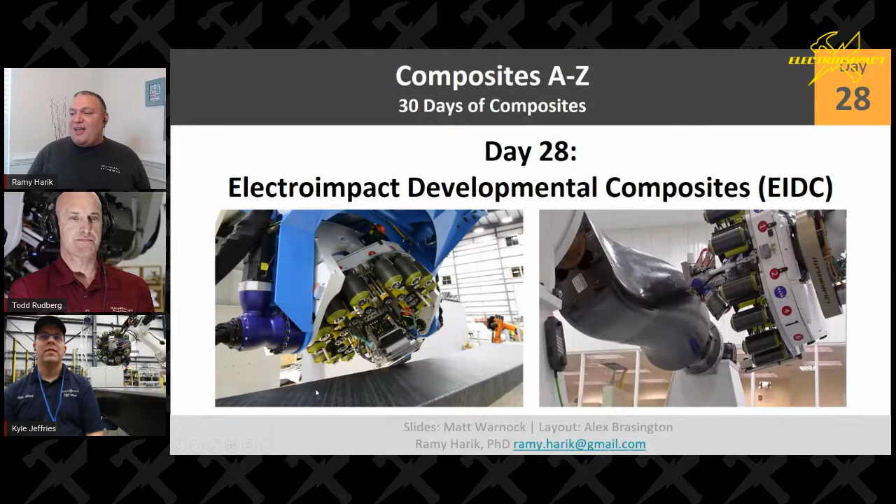Todd and Kyle, you guys have a presentation. We're going to power through - this is really more of a discussion we're going to have with each other. If I understand correctly, we're going to try to cover 4 elements: what Electroimpact is capable of doing, the motion platforms, Electroimpact technologies, and the Electroimpact processes. We're going to be powering through this, and we have some videos as well to play every so often.

So let's go ahead and start with Electroimpact capabilities. Who wants to talk about that? Is it you, Todd, or is it Kyle? All right, go ahead, Todd. Tell us, what are we seeing in here?

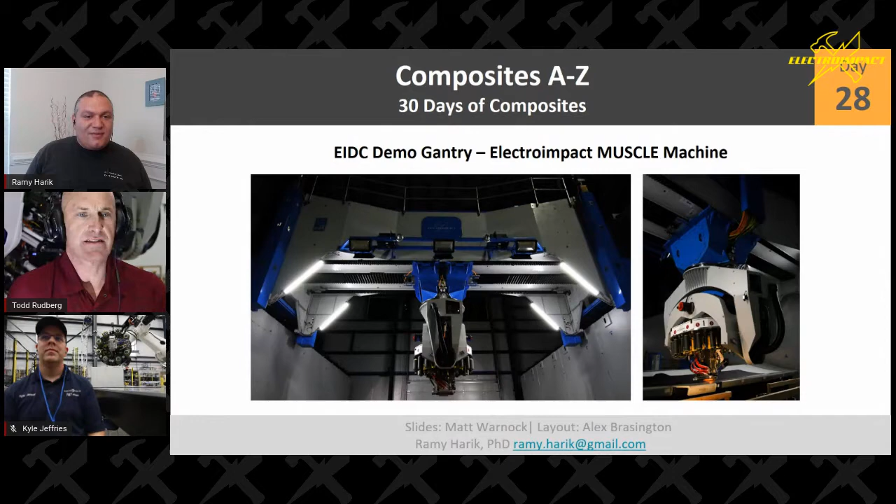Okay, so what you're looking at here is one of the machines in the Electroimpact Developmental Composite Center. It's a huge machine, very large envelope. Matt, go to the next slide, or if you could, Ramy, go to the next slide.

The machine that you just saw a picture of, I'm sitting in that cell right now. You can see that we have a huge envelope machine here capable of building - that happens to be the better part of a 777X wing spar in here. We've built 777X wing skins in here. We've built a bunch of neat parts for Airbus in here.

So we get to do a lot of work in here. If you have a large part that you need to see, or if you need to develop a process for some sort of large part, you want to see if AFP is the right solution, whether it be thermoset, thermoplastic, or dry fiber. We can handle all those materials here.

All right, this is awesome. So how big are we talking? I see on the screen there, we're talking about 84 inches travel in Z, almost 300 in Y. And I don't know if I can see it, but how far is it along X? Can you travel? Yeah, it's about 80 feet in X.

Oh wow, it's a big envelope. And the head can hit all 5 sides of a part - there's no limitation, the swivel head can hit, if you imagine a 5-sided part, we can lay AFP on all 5 sides.

All right, that's awesome. And this configuration, you said principally you guys are doing this for which part? I heard it's the wings.

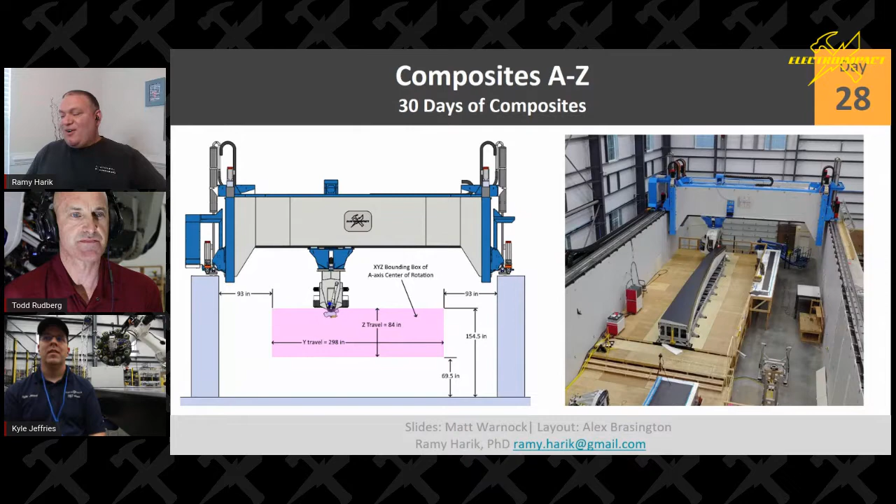All right, awesome. So let's move on to the next chart. So what is it that we're seeing in here?

So now, can you hear me okay? I can hear you perfectly, Kyle.

We have the big demo gantry that Todd just presented, and we also have a couple of robot assets for R&D in the same facility. We have a large temperature controlled building that houses all of the projects we build for customers, the machinery, the robots, the gantries, and it also houses the demo gantry you just saw and the robot behind me, and all of the robots we use for R&D.

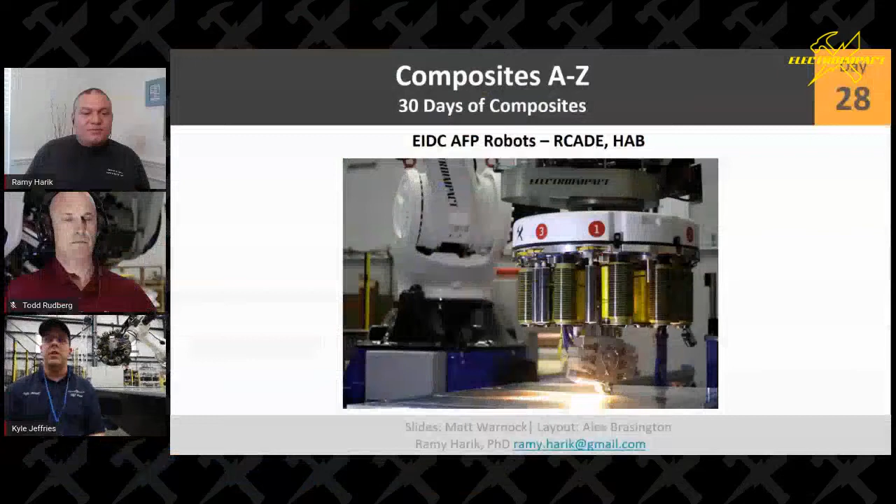The end effectors that we use on the demo gantry are transferable between any of these machines. They're all modular and quick change, so we can take a process or an end effector and move it to whatever asset we have available to do testing at the time. We do material development, process development, part trials, all the things Todd named with these.

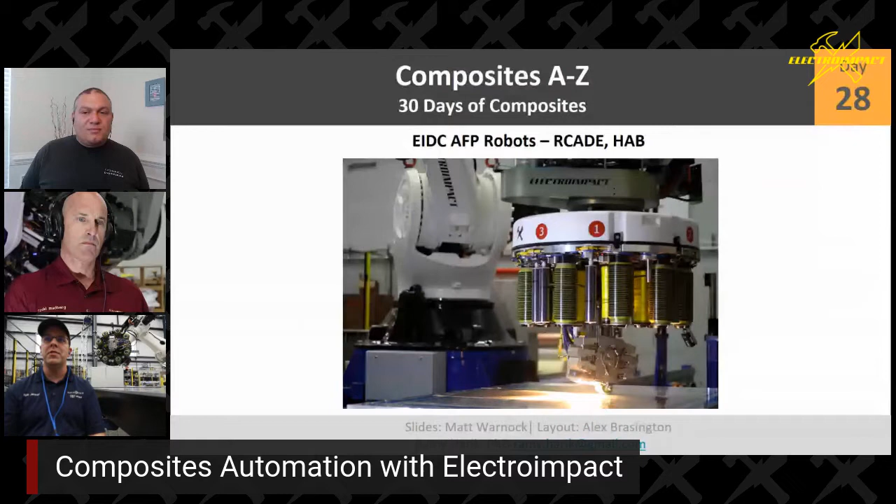We have some videos if Matt wants to throw one up of the robots in motion and the demo gantry building some parts here. Let's see if we can fire one up. All right, awesome. So go ahead, Todd.

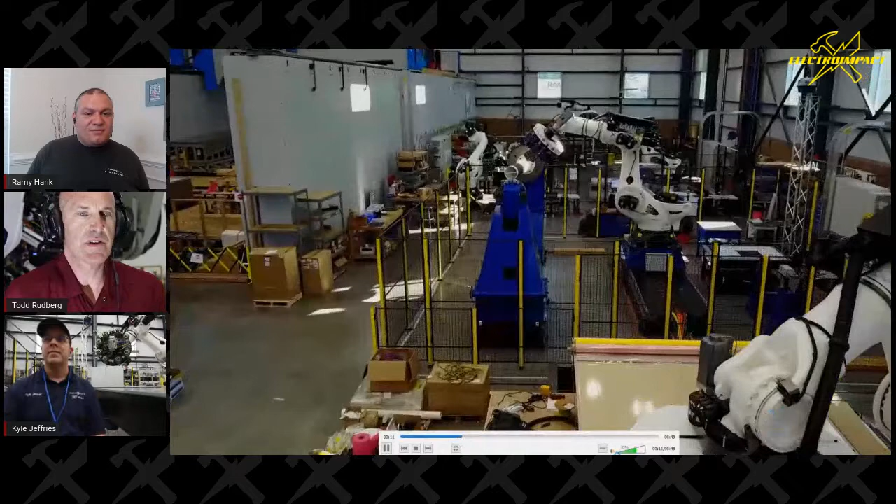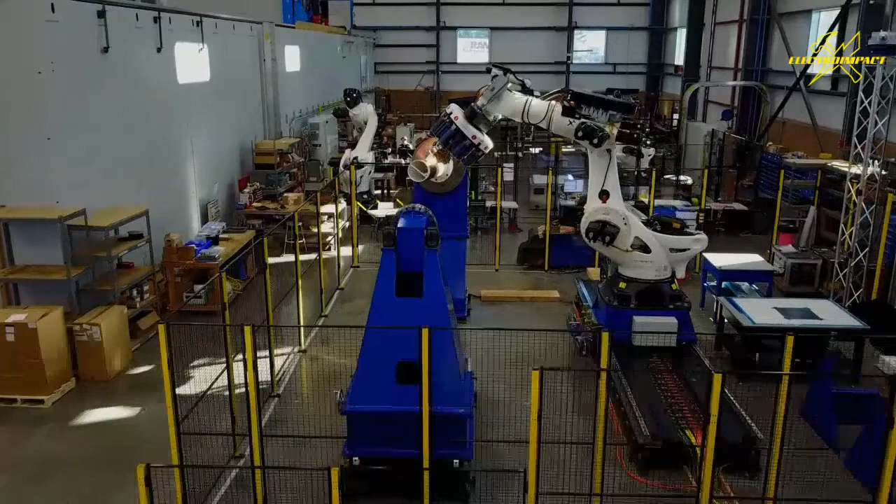Matt should be sharing a video of us building up the EI Developmental Composites Center. You can see the demo machine on the left, and a series of robots on the right. Some of those robots are production robots, and they're actually being shipped, already shipped, to customers.

The last two robots are actually our own robots. We keep them here for all sorts of development work. We have our own agenda, and then we also go on whatever agenda a college or whoever needs. So we do all types of process development.

We have that tool fuzzied out so you can't see it, because it's some super secret thing that we were working on for somebody. Yeah, I totally understand.

I wanted to say to the people watching us, and there's plenty of people saying hi and hello, a big hi to them. I wanted to say that the blurry picture you see is actually intentionally blurred, and it's not because of the streaming. All right, awesome.

So what does RCADE stand for, like in your terminology? So I can try to guess if you want. R for research, development. So go ahead, what is RCADE for?

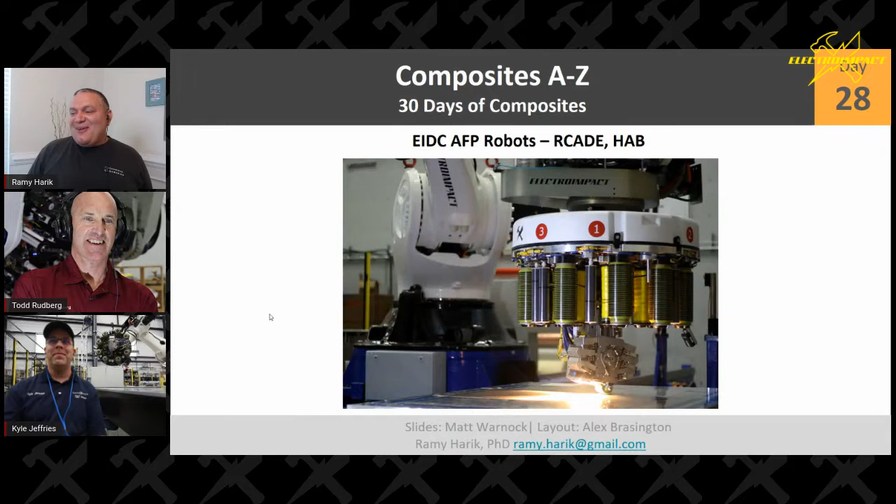It is Research Composites Automated Development Equipment. It's not a great acronym, but you got to make a cute name. So we got the cute name, RCADE, HAB. All right, cool. Yep, I agree with that. It is kind of fun, the world of AFP.

All right, so what is it that we want to talk about here? Is this some of your specific material trials? So that's a great overview of the RCADE cell. That's the RCADE cell in actuality.

So we use these 6-axis KUKA robot arms, and we accuratize them. We have a patent for accurate robot technology where we put optical scales on each of the joints to give actual position feedback. We don't use the KUKA controller for motion, we use a Siemens 840D. We feed the feedback into it, and we get a really nice, accurate robot. You can see it's on a 7th axis.

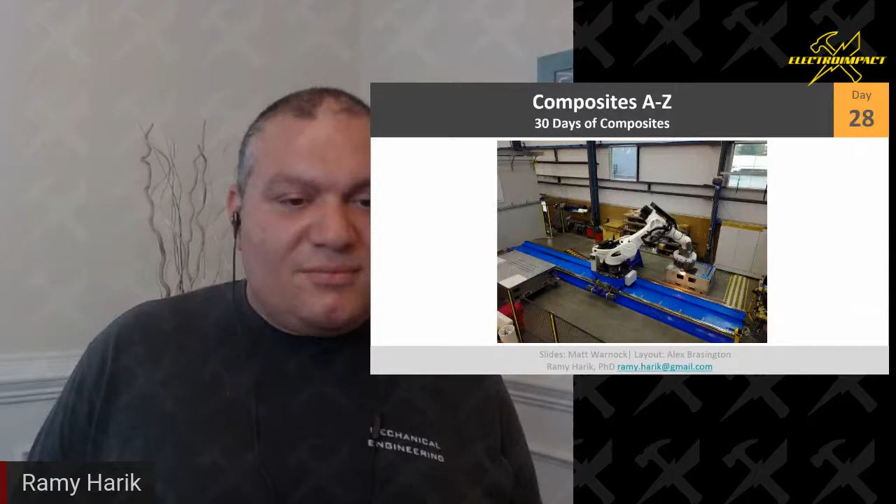A linear slide there on the floor, the blue piece. For customers, we do these with and without the 7th axis, depending on the part family you're trying to reach, basically your working volume of the system. The 7th axis obviously gives you some flexibility in working volume. We also pair them with rotators, so vertical rotator, horizontal rotator, and even parts as large as 20-foot diameter, 50 feet long. We have done layups for production with these AFP robots.

All right, so this is the RCADE. Yeah, that's RCADE. So is this like your own little makeshift table to try the layup on? Yeah, that piece there is just a piece of test tooling, and that's flat layups. So we might pull coupons off of there doing process trials with a material vendor like a carbon company.

They'll come in and do trials with us to help develop the next generation of composite materials for prepregs or dry fiber. And so you end up in those situations, you start with a lot of flat panel work, and we'll use a simple tool like that. Then at the end of that previous video, you saw the blurred out tool.

I actually wanted to ask you a question. Did I see correctly in the video that you played, there was a tool mounted on a mandrel, but it wasn't axial, it was shifted and rotating around it. Did I see that right? Okay, I saw it right.

We'll call that a party trick. So anybody can lay up on a round tool that's concentric to the spinning axis to make sure that we had all of our kinematics correct for more complex spinning geometries. We canted a pipe on the tool so that we could test and demonstrate our kinematic control.

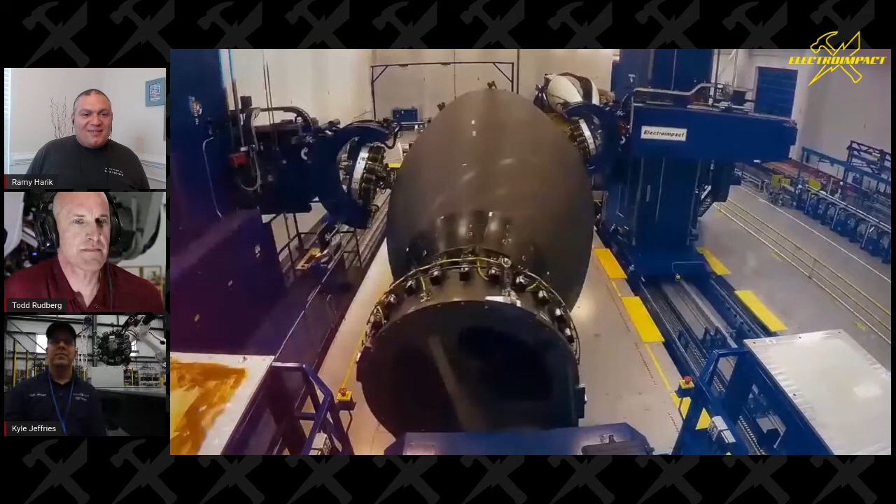All right, this is awesome. I see Matt has another video ready for us. Should I go ahead and try to see? All right, so what is it that we're seeing on this one, Todd? Okay, I've jumped ahead to the robot video for Kyle so you can continue. Oh, okay, so yeah, this one.

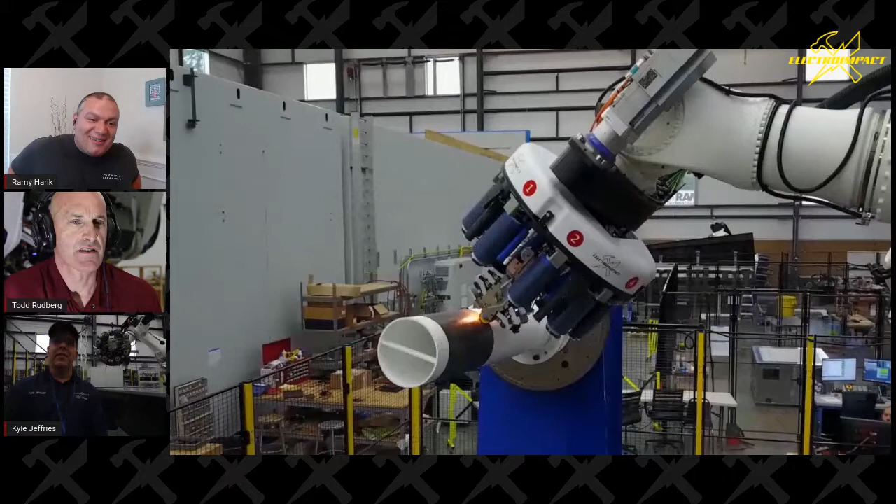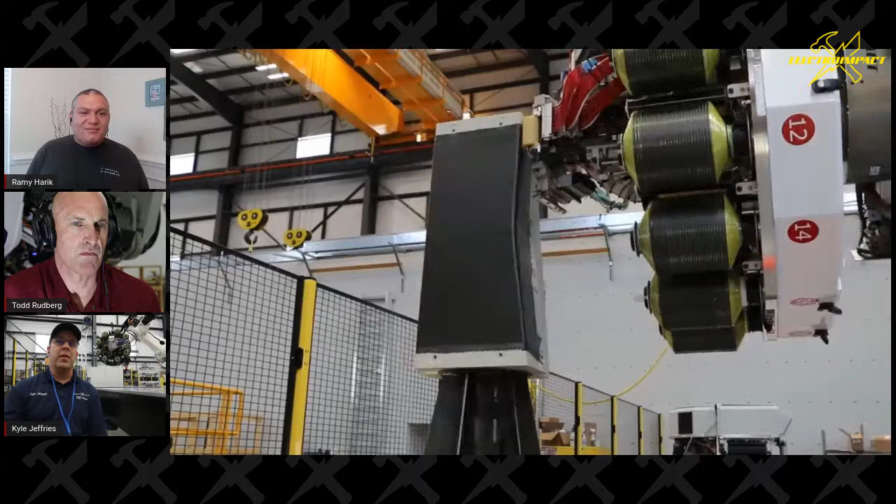There you can see the party trick in a little more detail, and again that's just a demonstration piece to work out our tricks. This is an actual customer layup where we're doing layups over core. You can see the core height is fairly significant and the core ramps are pretty steep, so it's a very challenging layup. It's very difficult to get all of the material down into the concavities without bridging, and to have accurate control of your compaction force so you don't crush the core.

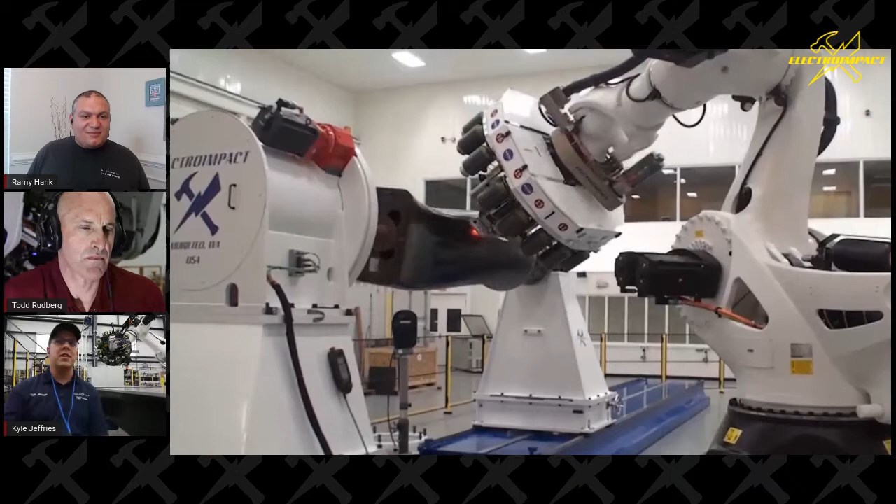This part, you've got a spar shape where you've got a 3-sided part, so there's your small vertical rotator. Again, the trickiest parts of a spar are getting really precise kinematic control, so you know precisely where the tool point is as it goes over the radii, and you get really good tow placement, no laps, no gaps.

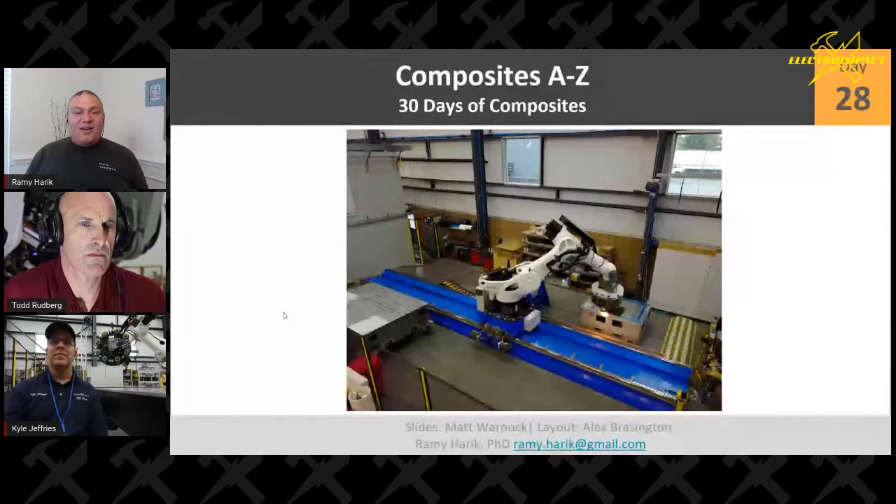So moving on within the charts, what is it that you want to focus on these charts? We're seeing the head up close and personal. So tell us a little bit about the development of this head.

Yeah, so this is another view of the RCADE cell again, but you can see a close-up of the end effector there. Todd and I have been working in this Composites Automation group together since it started at Electroimpact. So we've seen this technology come from its infancy to being really mature for production and R&D environments, and we definitely have an eye for the future.

This product, the 16-tow head on the left, was designed with kind of a clean sheet look at how to handle the sticky black stuff, but increase the deposition rates, obviously, and also increase reliability of the process. The whole head was laid out with the idea of a modular head that disconnects from the machine with a robotic tool changer, giving you process flexibility, and also allowing you to remove the process end effector from the motion platform when you need to replenish the spools or do periodic cleanings.

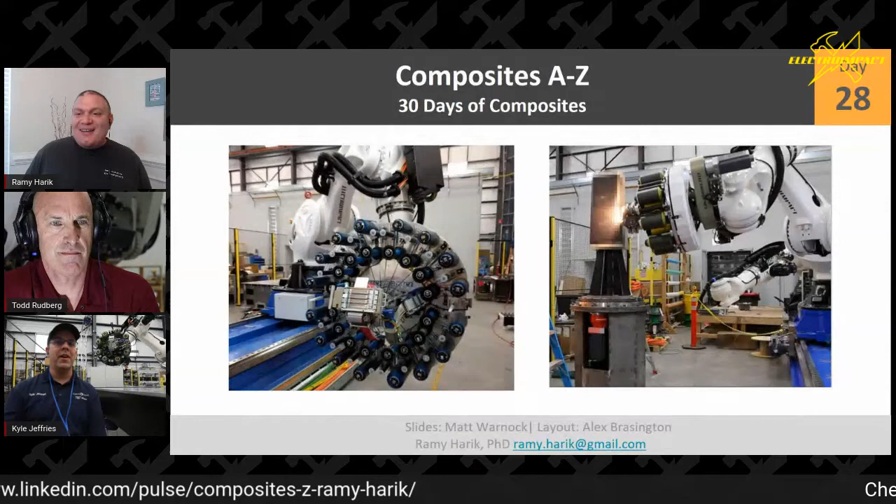It was kind of a revolutionary concept at the time, and part of what came out of it was a very short, simple tow path, in contrast to AFP machines of the day. It turned out that short, simple tow path, while allowing us to build this small modular shape, also drove up the reliability by big factors. It's sticky black stuff—you want to touch it as few times as you can, and get it on the part as quickly as you can. You don't even want to try to touch it in some instances. The ideal is not to touch it, so we got as close to that as possible.

So let's see—this is a little bit of what you're talking about, this modular process heads capacity, to easily inspect, easily correct, easily replenish material, easily clean up if you want to, and reduce as much as possible the downtime.

Let's talk about this. In a recent presentation I made, my numbers come from academia, from estimation, that the estimated downtime for inspection and repairs of the machine goes more than 50% of the time. Is this something you've observed, Todd? Can you talk to us about it?

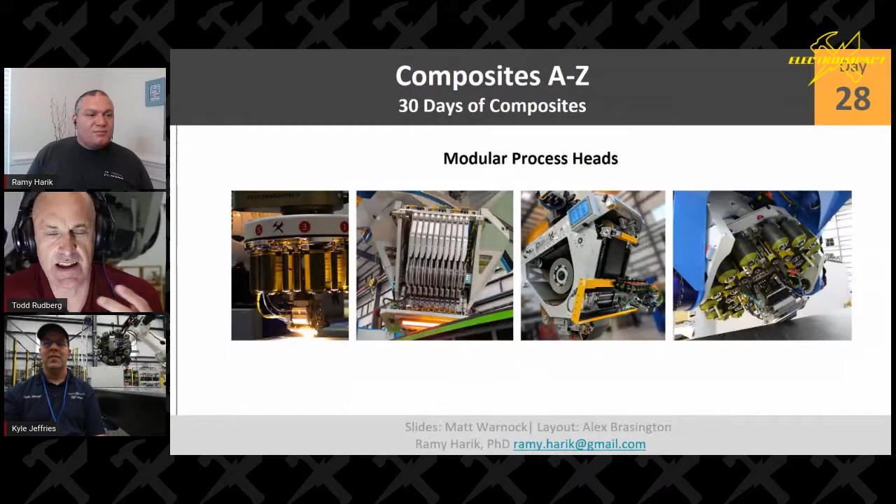Yeah, I'm glad you brought that up. If you go to the next slide, we've started development of a new AFP philosophy. When we started, the world was on AFP 1.0—your Cincinnati machines, Vipers, doing layups and struggling their way through—all the way to where we're at now, AFP 4.0. With 4.0 we've looked at the whole process, including inspection and all the other time items in the ply-by-ply cycle. We're currently developing that technology now.

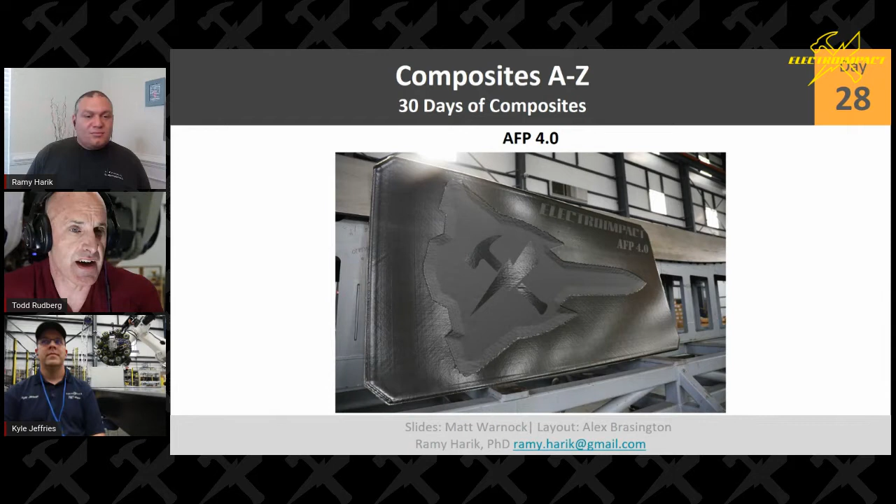If you go to the next slide, this is a great one to look at—here's where we're at with AFP 4.0. This is one of the test parts we're making. It's a very challenging part, with lots of short tows, lots of little tiny gaps, many ways to trip up the AFP process. We're very good at doing that layup, but we're also very good at inspecting it. We want to make sure the ply fill meets the criteria the designer who drew the ply boundary intended. Our equipment automatically determines if you meet those ply fill criteria, in real time.

Okay, let's go ahead and show the AFP 4.0 video, Matt. So Matt's going to play a video here.

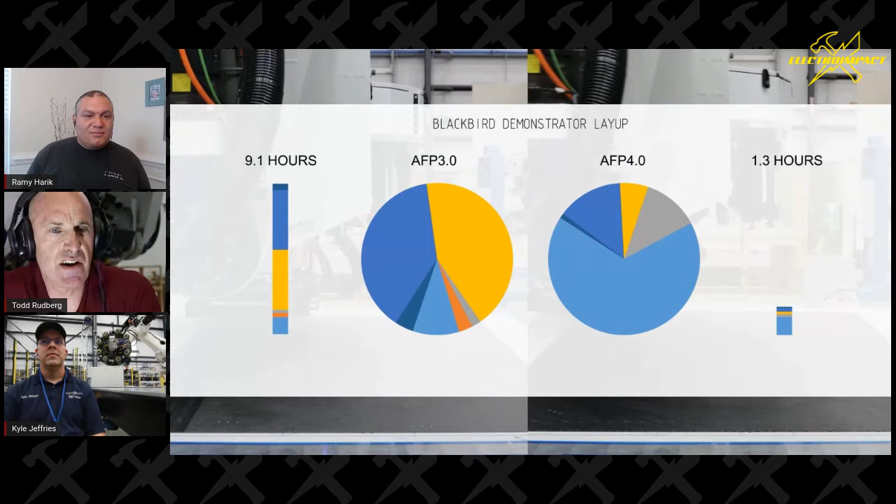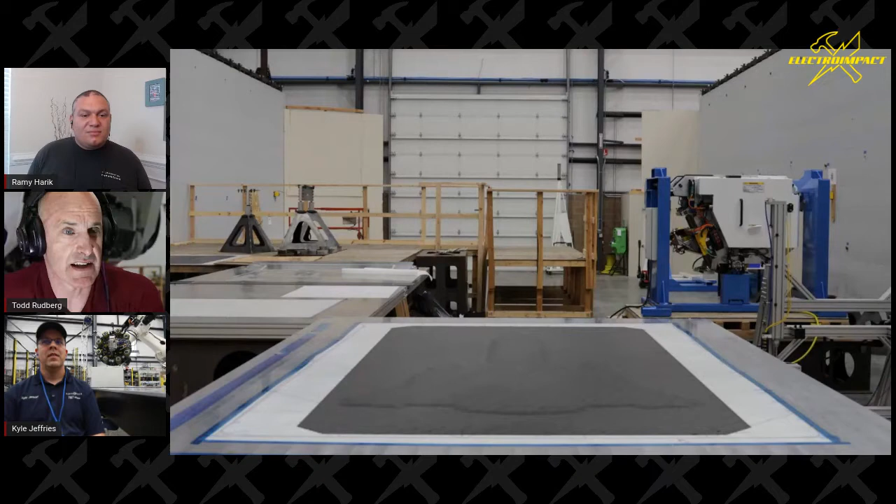Basically what you described is the problem—in 3.0 you're getting really low runtime. Hopefully in 4.0, and we're actually demonstrating in 4.0, extremely high runtime percentage. The way that helps is we're not running the machines any faster, we're just running them more often, so you get a lot more utilization. The goal with AFP 4.0 is to deliver anywhere from 3 to 6 times the throughput in an AFP cell compared to today's ply-by-ply cycle.

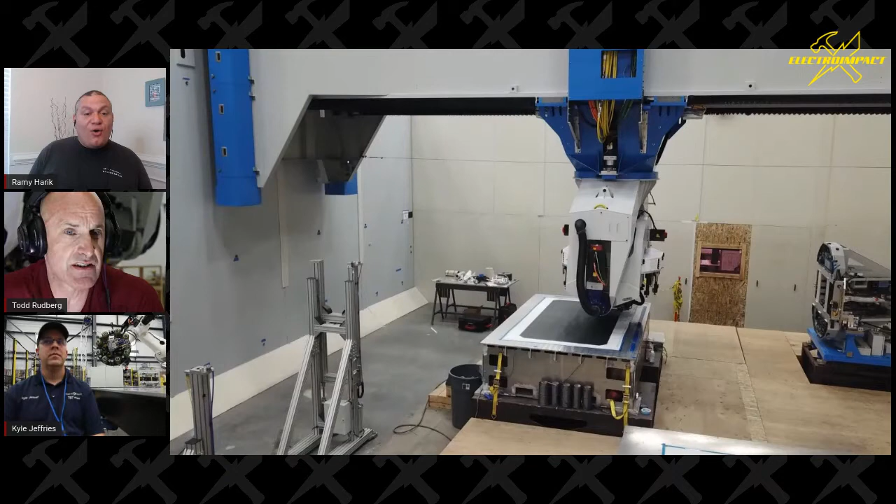So you're seeing here our AFP machine in the demo cell performing the layup. I'll let this play a little bit and talk through it. The machine is laying up at 3,000 inches per minute—every add, every cut, every event that occurs. Extremely fast.

When the machine finishes a ply, instead of stopping and somebody coming out to touch it, since the inspection process is done automatically and the ply fill is assured, we continue on to the next layer without any manual inspection. We've completely automated the inspection process, and we demonstrate it daily here.

We also do live streams once in a while when we're feeling confident. We say, oh, we'd like to fix these 5 things, go work on those, then do the live stream again. If we had an email list, we'd invite everybody to watch. Basically all you'll see is an AFP machine running 100% full out, 3,000 inches per minute, for about an hour—about how long it takes to empty the head.

Every ply will be inspected, and we won't drop any tows, hopefully, during that. Typically we don't—there's the equivalent of over 10,000 tows in that part. We talk about mean strips between failure; our goal for AFP 4.0 is a mean strips between failure in the 100,000 range. To put that in perspective, Section 41 of the 787 has about 180,000 strips of tow in it—so we're talking about maybe not dropping any tows for the entire part of an entire twin-aisle fuselage.

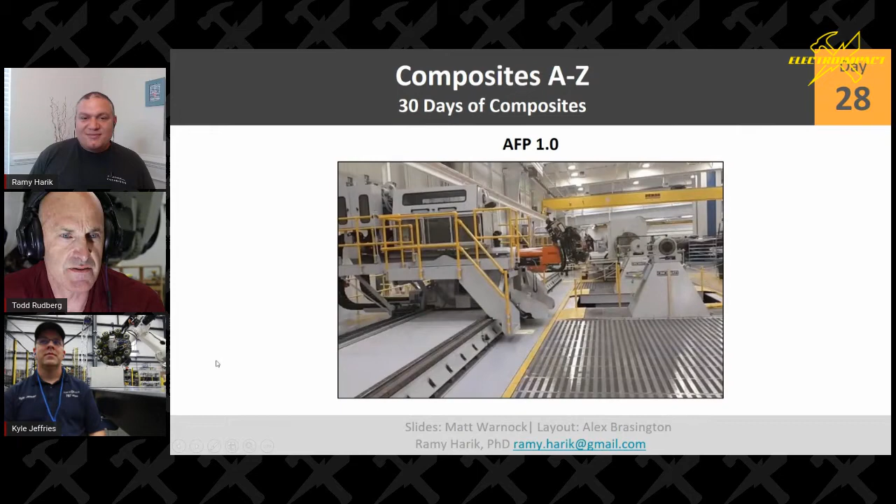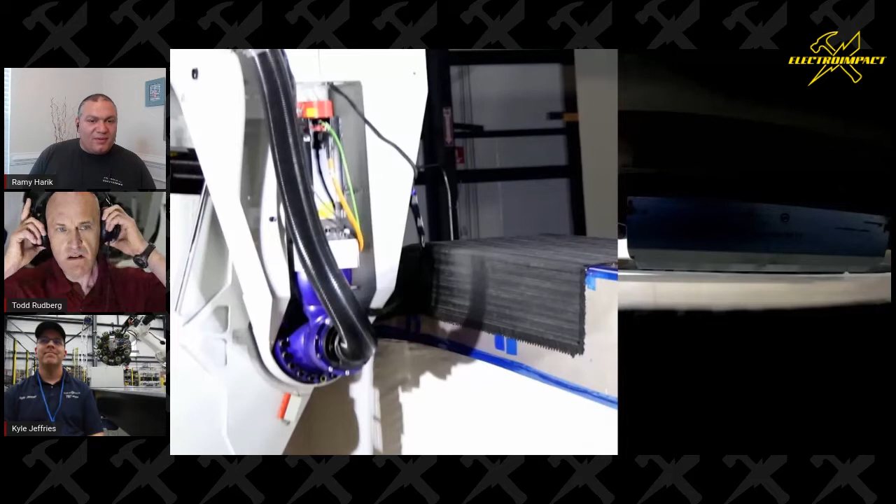So I have one video from Matt. Is this a video that he wanted to play? Yeah, we could play that. I don't know, is this the process one?

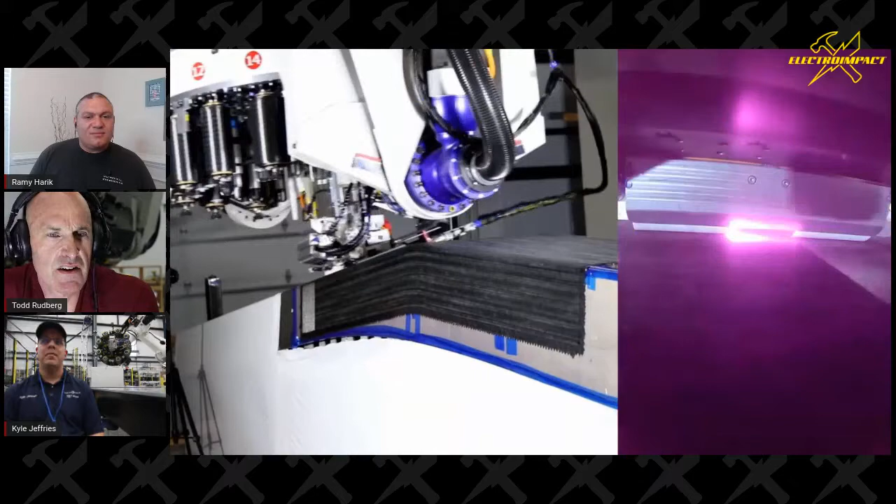This is more process related. Here we're showing the layup of dry fiber with our equipment. This is one of the developmental things we can do here. This was done on the demo cell. That's a spar part, not a Boeing one, but it's still a legit spar part. You can see we're able to lay dry fiber very effectively with our process head.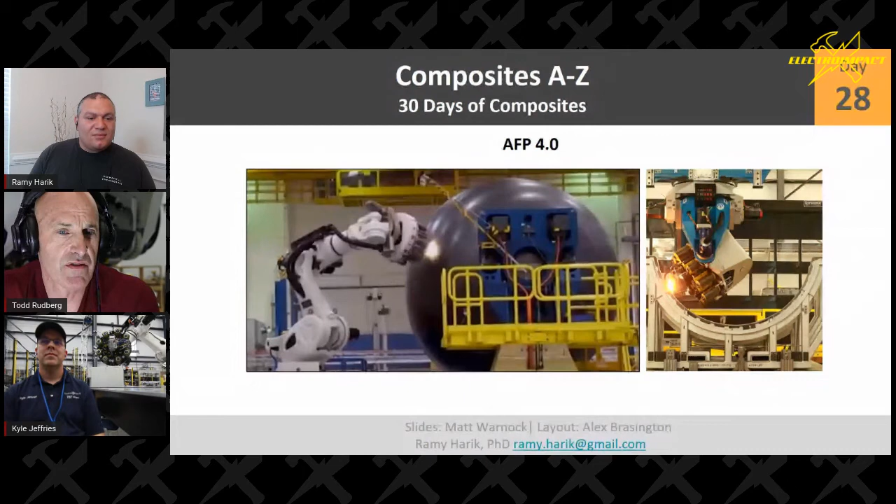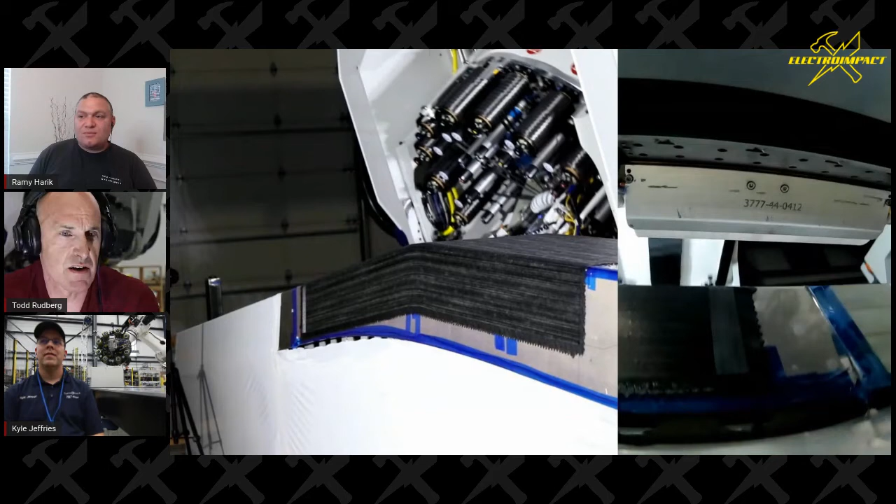It took us a while to get there, and we had to involve bringing in lasers. We do integrated lasers, and we also do third-party COTS laser systems that strap onto the head. In that video, you saw the third-party COTS one, the strap-on version, equally effective to our integrated one, just restricts the machine motion because of the umbilical. But we also have one fully integrated into our AFP head.

So I have a question. What is this heating mechanism I see? Is this not IR? Yeah, this is not IR... actually it is an IR laser. It's made by Laserline. It's the most common laser used in fiber placement today.

If you walk around, you'll see Laserline systems melting composites together all over the place. We also have our own proprietary integrated IR laser system that we're in the middle of patenting. I'm not going to go into the deep details, but it's very effective and 100% integrated into the modular head.

Awesome, I'm looking forward to hearing more about that. So this is the point you were talking about, Kyle, before for the pressure vessel, that the robot's reach envelope for accessibility is quite substantial.

In this case, what we're trying to show is similar to the point you're making. The tan embodiment in the background is the basic reach of a Viper type AFP system, back to the AFP 1.0 style. Overlaid is one of our robotic arms with a head, and the green volume shows where the robot can reach. The robot is a very inexpensive motion platform, so at a fraction of the price you get something that dwarfs the reach of those old systems and gives you a lot of flexibility.

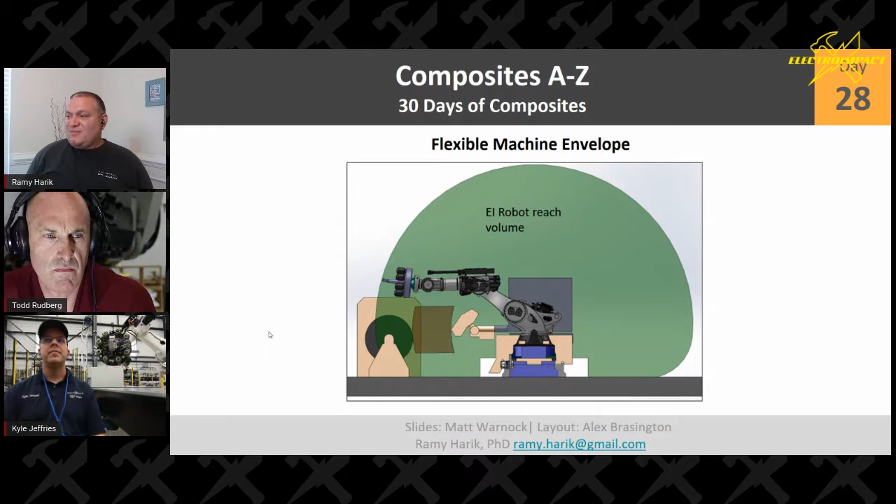So what is Ripit? Is this what enabled 4.0, Todd? Yeah, it's one of the elements of 4.0. There's probably 4 or 5 different technologies that lend itself to AFP 4.0. I'm going to highlight this one, Ripit. It's a cool name, stands for real-time in-process inspection technology.

What it really is, is real-time ply fill assurance. The designer says, I want this shape filled, and makes a program. What Ripit does is make sure we adhere to that ply fill by ensuring the tow ends are in place, and that the lap gaps between each of the tow interfaces are within specification.

We're also doing FOD detection now, so we've got pretty much all the aspects of ply fill handled with this. It takes about 5 seconds, even for the most complicated ply, for the inspection to be done, and then we're able to move on to the next ply. So in some sense, Ripit enables you not to rip the tow at the end to replace it.

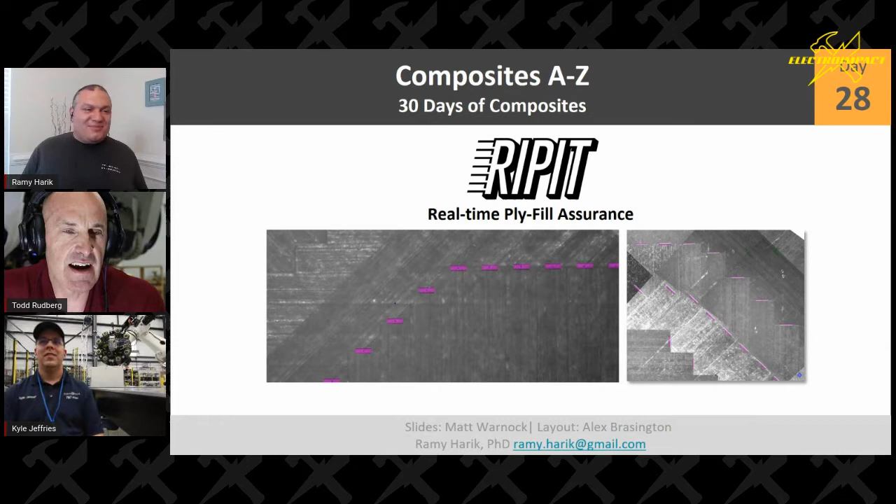That's right. We are driving, with every bit of energy we have, to get rid of the need to touch the part with human hands. We've made huge progress even in the last 3 months.

That's awesome to hear. This is just real quick, I'll cover this slide and then we'll be done with inspection. This inspection system isn't just a pipe dream. Boeing cannot build a 777X wing skin without this inspection system running. This is Boeing certified, legit stuff. You're actually looking at a screenshot from a part that's been inspected in the field at Boeing.

So is my understanding correct that you're officially skipping human inspection using the system? We are not doing that.

We expect that our customers will demand that in the very next go round. We are all right.

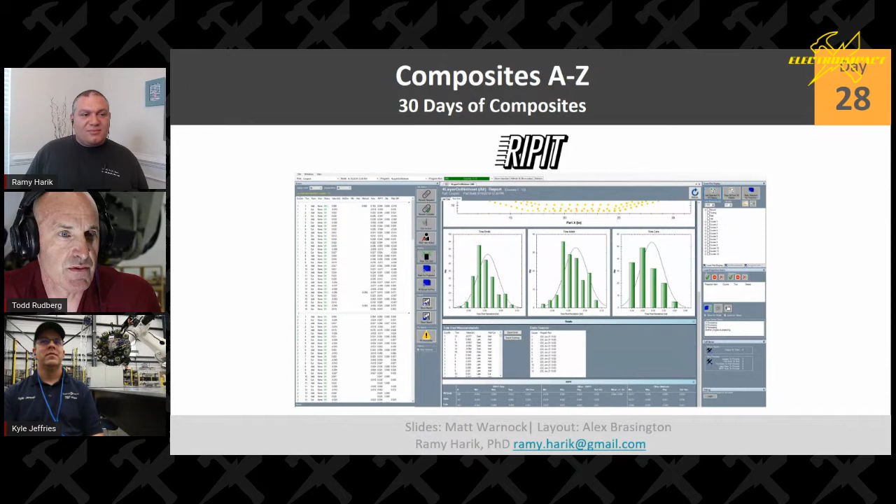Okay, so there's a couple things here. Todd's mentioned we've been talking about where a lot of our R&D goes, and very recent R&D has been the highlight of that AFP 4.0 discussion. This highlights R&D from the past couple years, including alternative materials. Matt has some videos he can play whenever he's ready, and I'll keep talking.

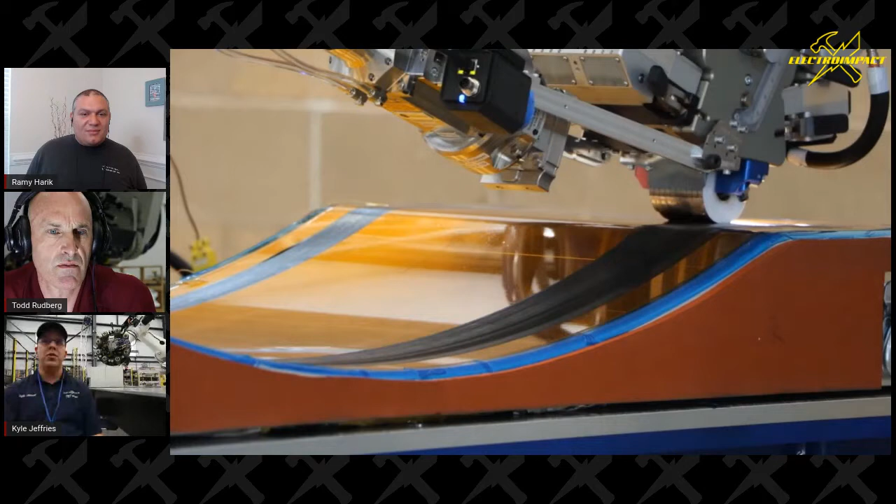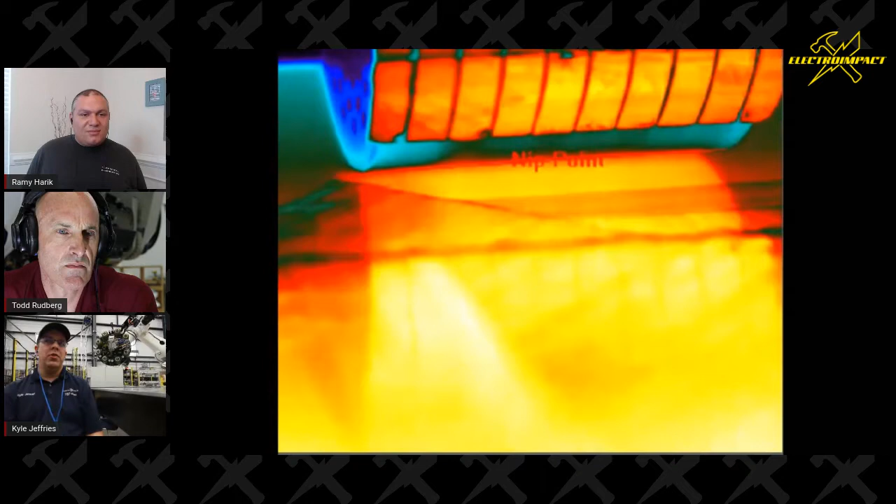But there's probably three key pieces. This video is showing a thermoplastic layup, and we delved into thermoplastics over the last two years, and now we're among one of the industry leaders in thermoplastic processing. Everybody knows one of the keys to thermoplastic processing is a high intensity heat source.

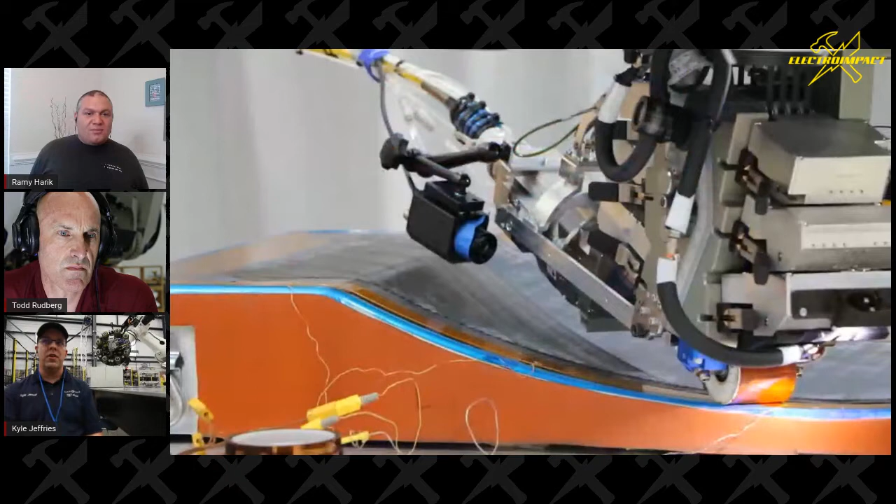We've experimented with several different high intensity heat sources with varying levels of success and failure. But what you're seeing here is a heated tool with a high intensity heat source from the head, doing a complex layup with the goal being in situ consolidation at the end of layup. There's a lot of people working on this sort of material processing, and it's definitely something we've picked up as an expertise.

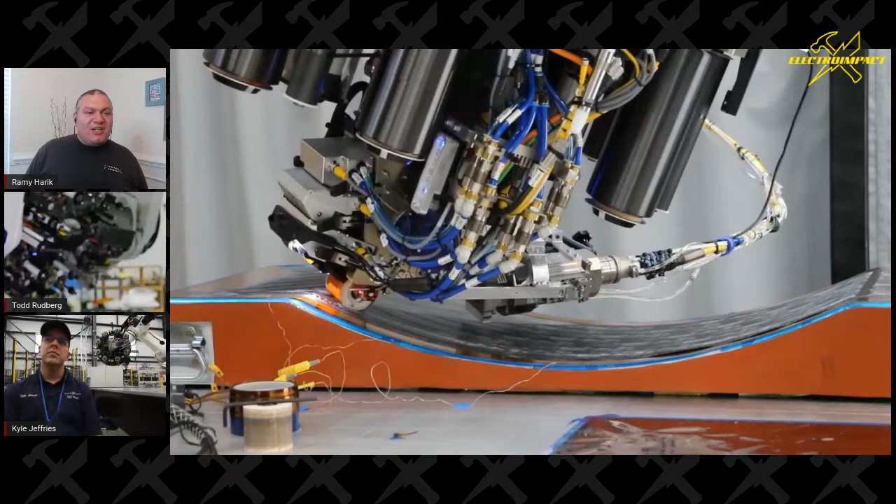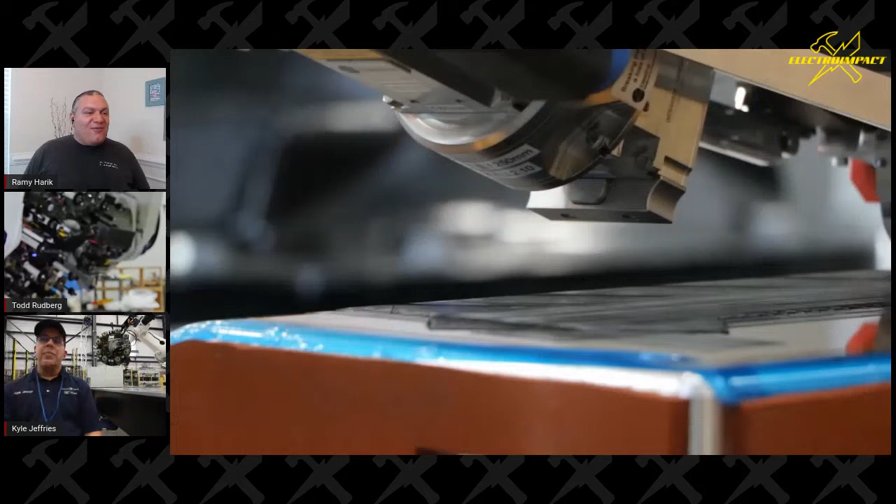So let me ask you a question, I don't know if you're allowed to say it - what is wrapped around the roller? I believe that's a Kapton wrap. With the high intensity heat source and higher part temps, what you're doing down at the roller interface changes. And there's Todd holding that actual test article.

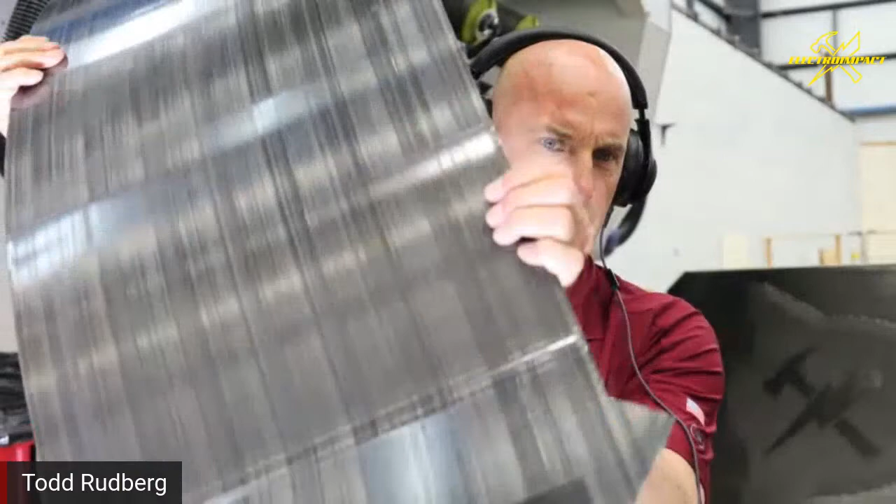We made a handful of them. All right, that's awesome - yeah, so that popped out of the mold.

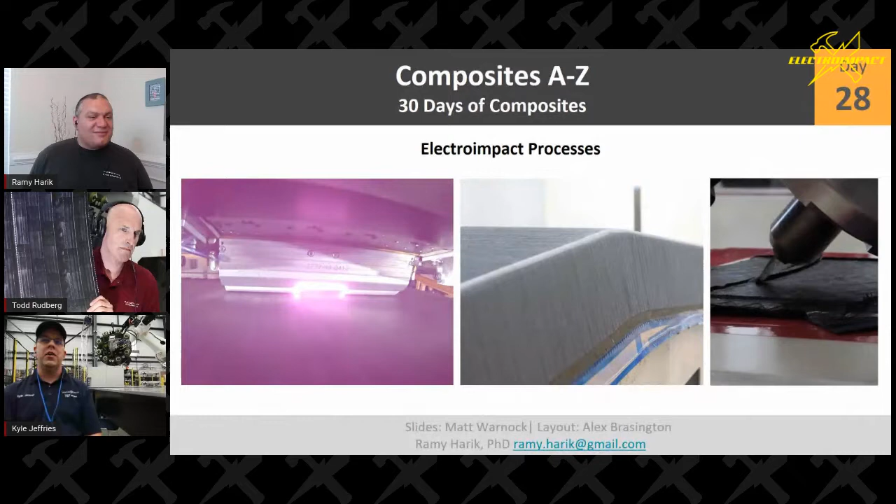So the typical problem with these - I'll call it a skin layup with thermoplastics, like a thin shell part that isn't a closed section - is they'll potato chip real bad. If you try to make a flat panel with in situ consolidation with the thermoplastic system, you'll lay it up flat and it'll turn into a Pringle. So having something that comes out of the same shape you laid it up is the panacea of that process technology. All right, this is awesome.

So we don't have slides anymore. Is there a couple videos we want to talk about? There's a couple more videos. So in that process development, we'll see what Matt cues up here.

3-ring circus. So this is ultrasonic cutting.

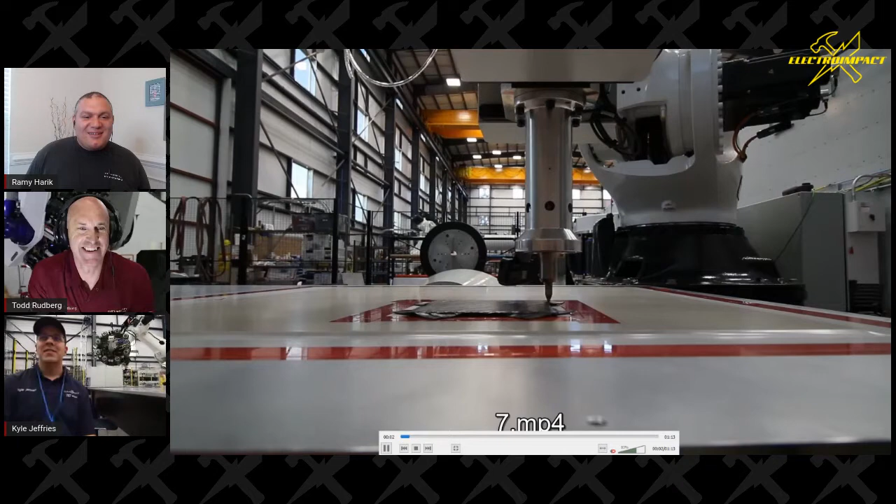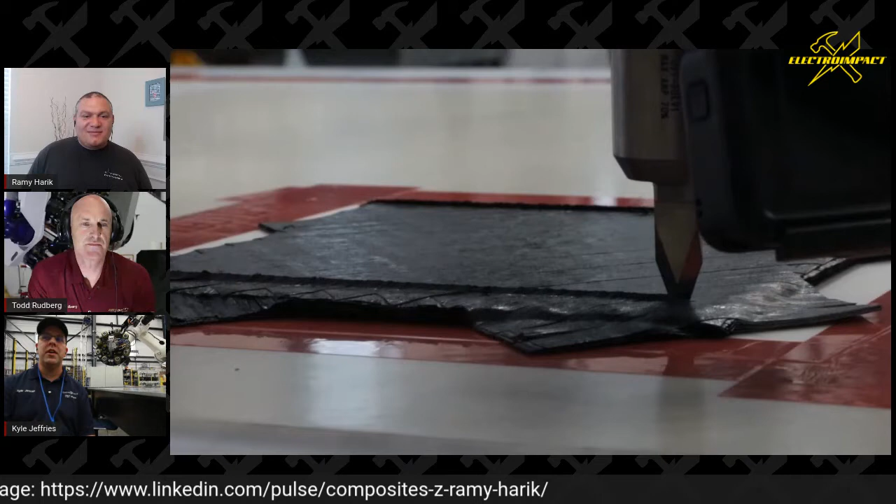This is another technology we've actually delivered a lot of, both into production and R&D environments. That's an ultrasonic knife, which happens to be on the end of a robot. We've delivered them with our big machines and our robots. It's not a new technology.

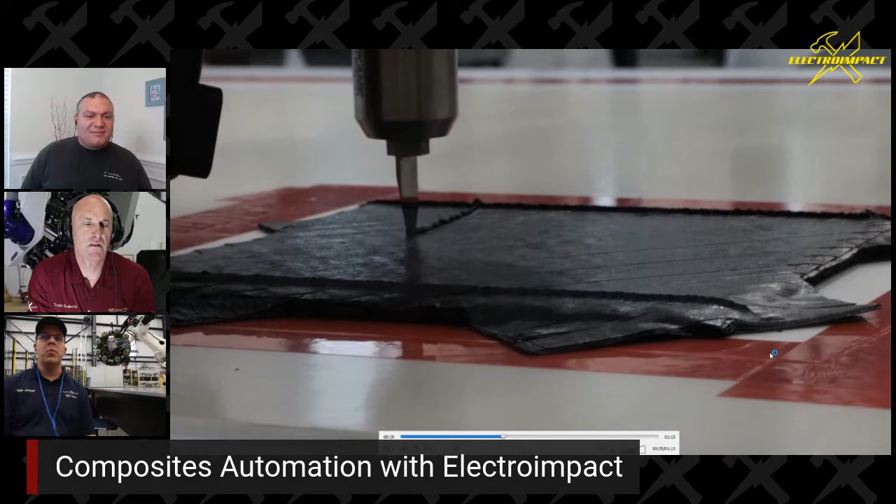Putting it on the end of a 6 or 7 axis machine is somewhat novel, as there's not many suppliers for that technology. The tricks for that process are getting the highest throughput for cutting thick stacks, and also doing part beveling, which is what you're seeing right now on that video - low angle bevel cuts with tool point accuracy and good edge finish. I think you'll see a shot of the finished product here in a second.

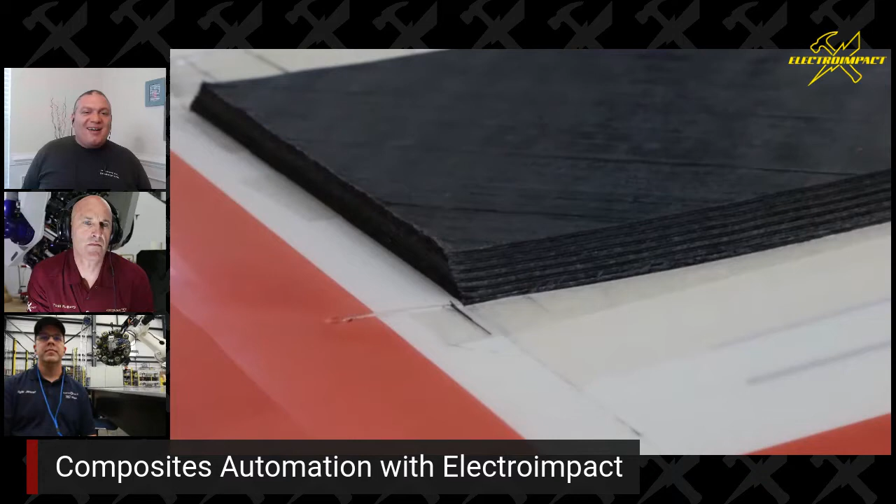I have a little confession to make. One time, a couple years ago on Christmas, I used the ultrasonic knife to make Christmas ornaments from composites. So okay, I thought you were going to tell me you carved your turkey with it. Hey, you're giving me ideas here.

All right, this has been nothing short of awesome. Is there any more videos we want to play, or should we have some concluding words? So I see there's a video. Let's go ahead, real quick, yeah.

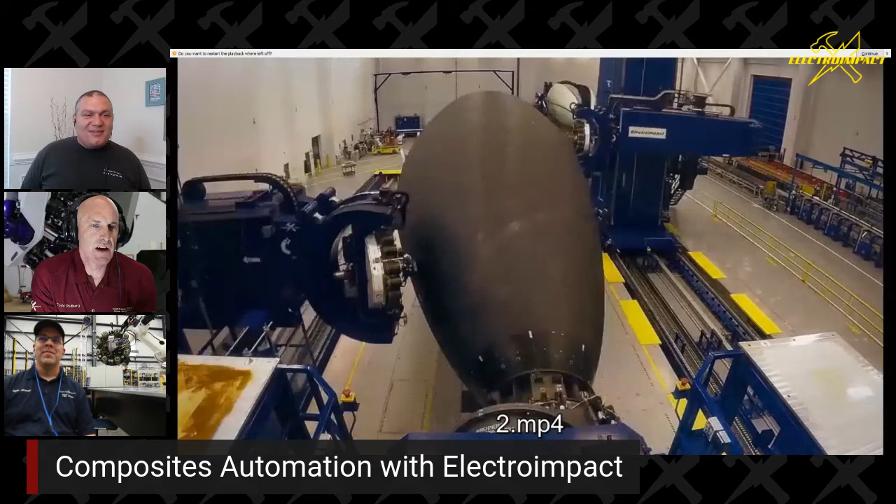Go ahead and rewind that. Okay, so this is just a kind of wide-ranging video - it just shows different pieces of equipment we've delivered throughout the years.

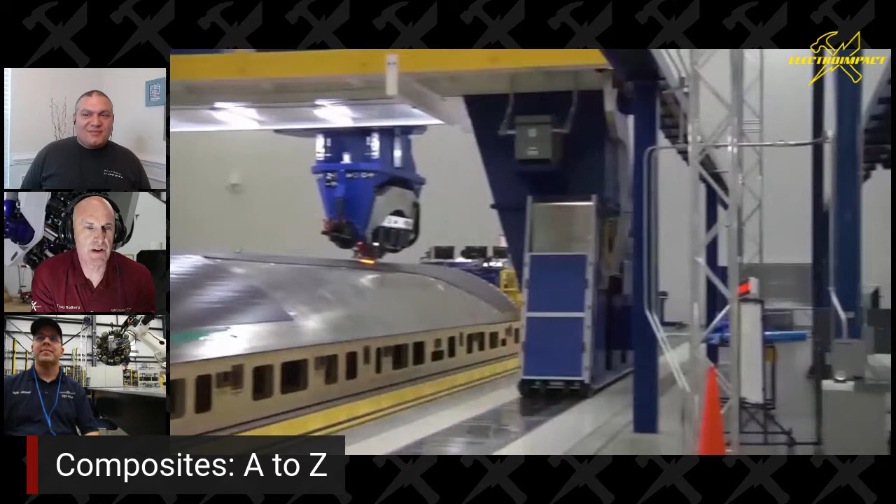This is for section 41, a twin-aisle airplane. Another twin-aisle - this is the A350 machine here. So we're doing fuselage sections in both of those two.

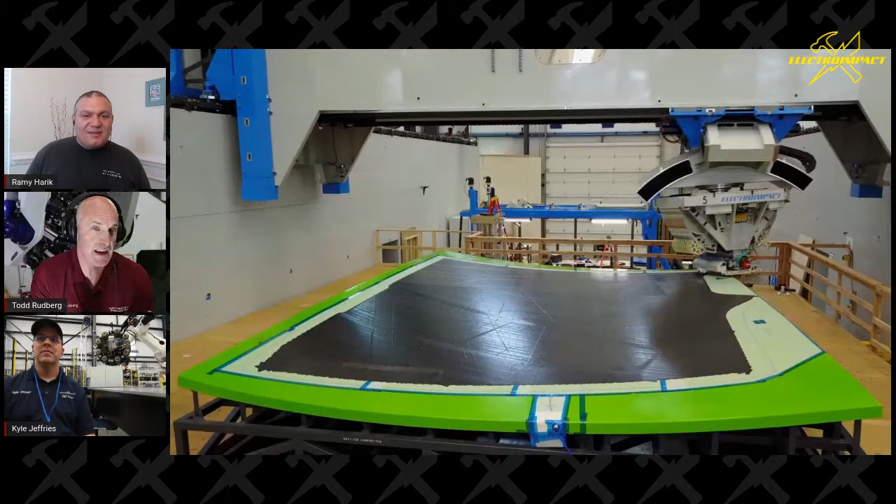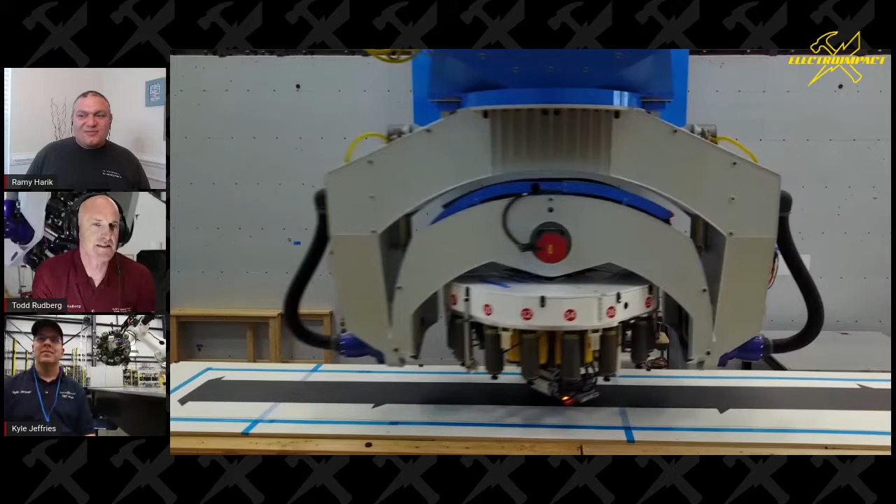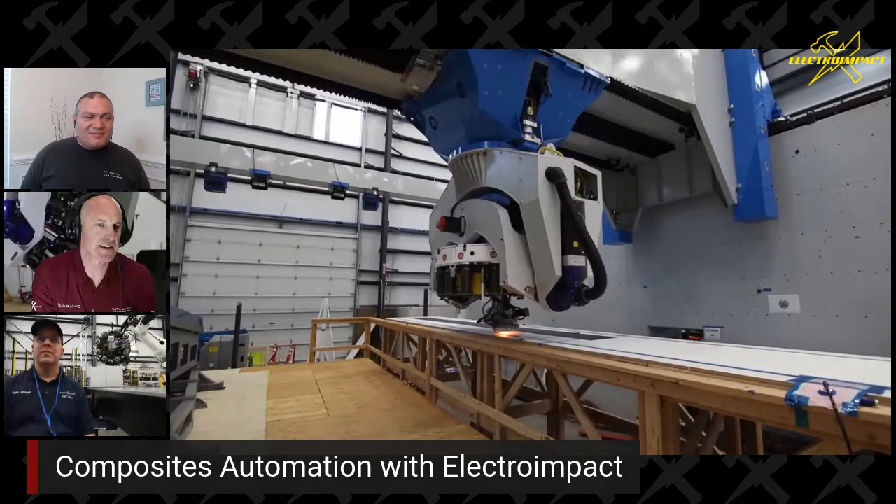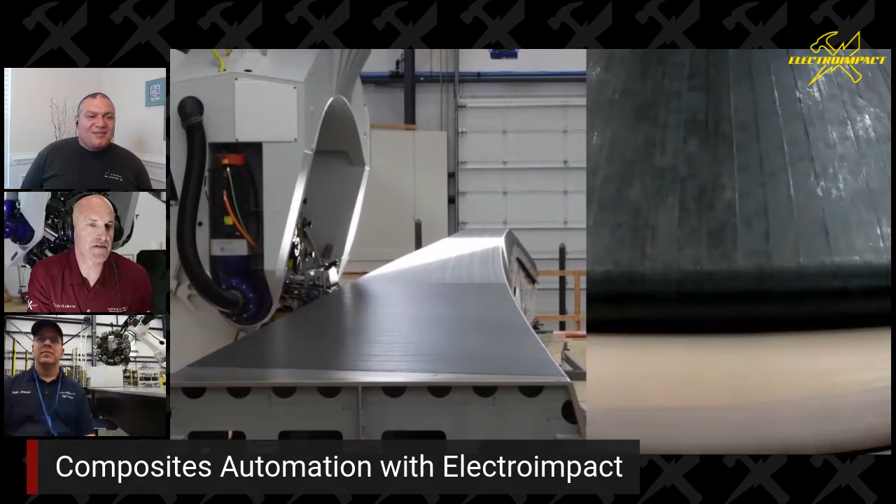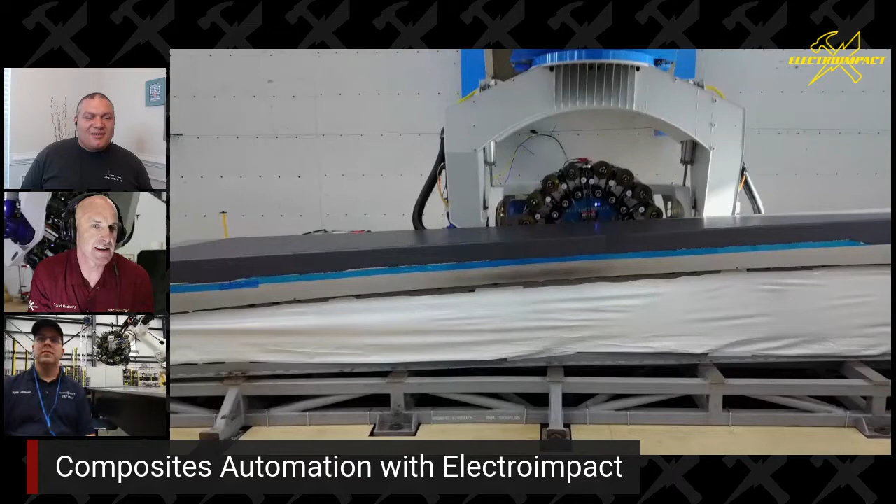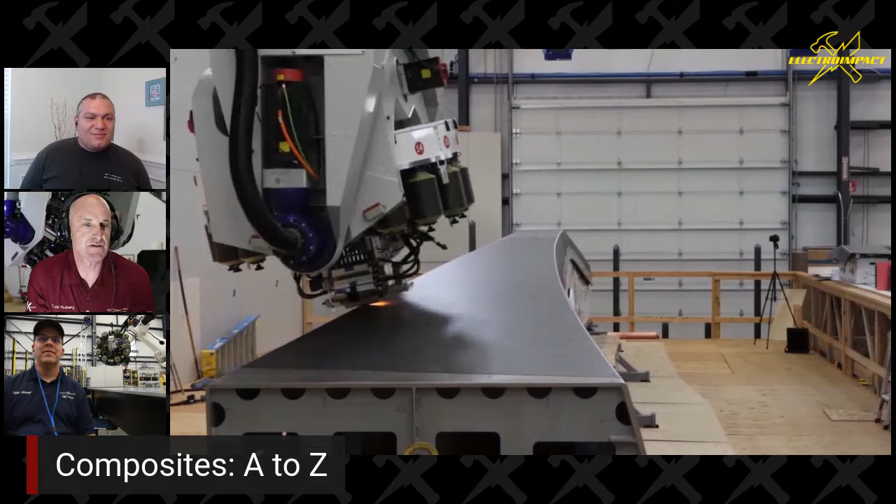This is an actual 777X wing spar that we had to build here for Boeing to get our equipment approved. We still have the tool, which is really cool - they let us keep it, and we do demonstrations with it every now and then. That's a cool takeaway. We have it right here, so if anybody wants to see how to build the spar, we'll throw it in and show them.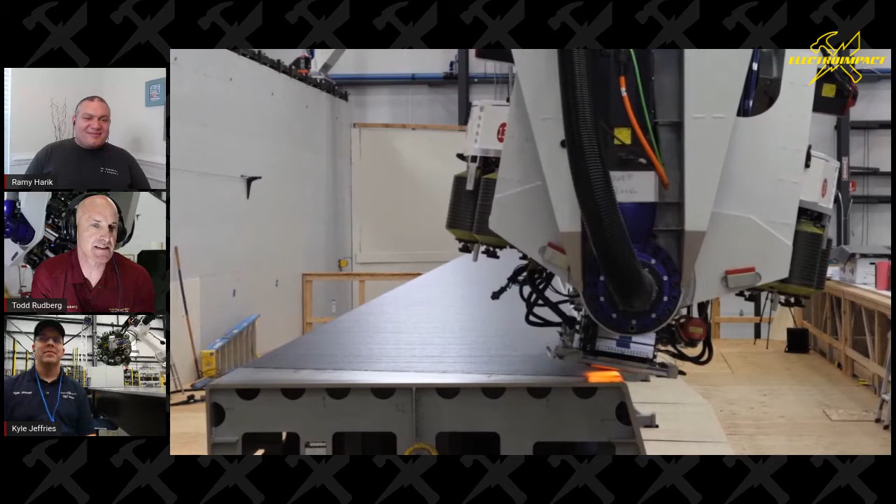You can see here, this is I think a unique spar in that it's an in situ one-piece spar. The whole thing is 110 feet long, so there's no splicing of pieces together - it's just one homogeneous part.

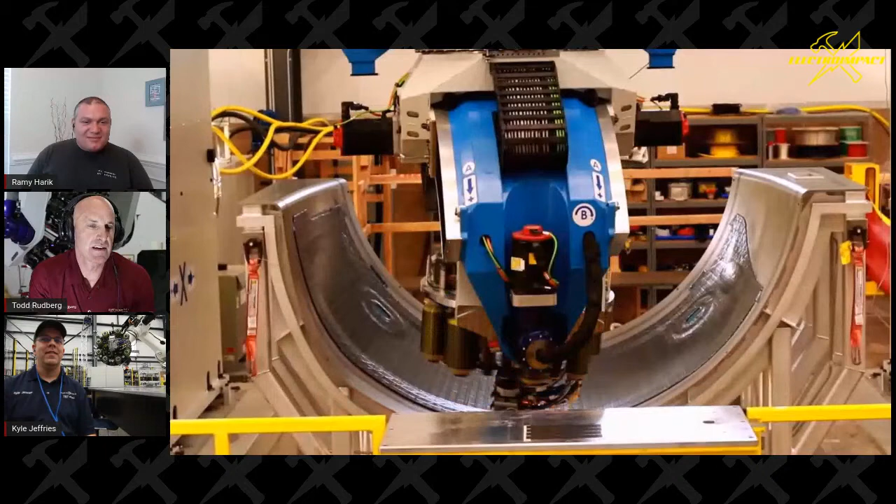That's awesome. This is an example of what we call, for some sort of engine part - engine nacelle or whatever. This is at GE, or used to be GE in Middle River. You can see it's quite a flexible system. There were actually 2 machines there - there's 4 x-axes, 3 heads shared between 2 machines. So we do complicated installations if that's what the customer needs.

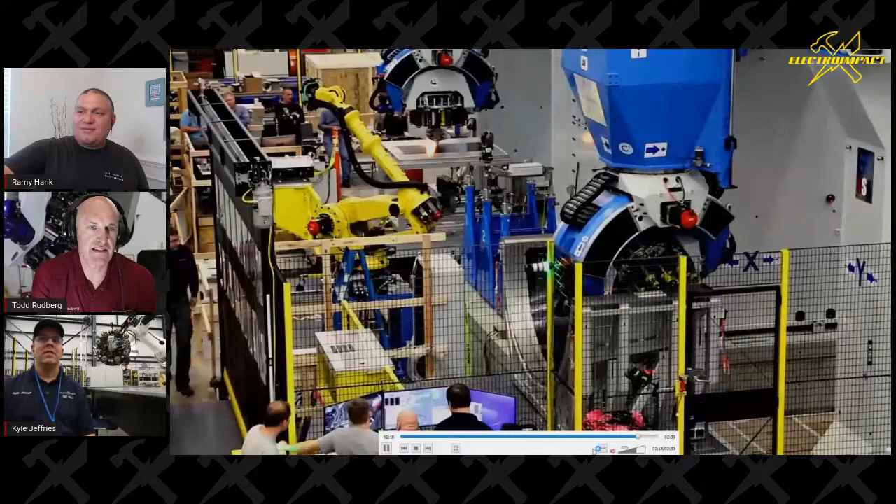That's awesome. This is a fascinating world, and I'm happy to hear that the concepts of advanced manufacturing and what we talk about as Industry 4.0 is making it to the AFP world. I often tell my students an AFP machine is just a machine - it's like it has no brain. Even if it's huge and big, there's almost very minimal closed loop control of knowing what's happening - you set up a temperature and you hope that's what it is. I'm glad we've come a long way, and what you're showing here is actually some closed loop processes, and this is nothing short of fascinating.

Before I let you go, is there any option that you, Kyle or Todd, can take us a little bit up close to the machine, or is the setup too hard to do that?

Let me check with my media guy. Film me while I go to the head. Okay, we can do it, but I won't have a headset. All right, no problem.

So before you do that, Todd, how about you give us some closing words from your side?

Just to back up what you said, Industry 4.0 has been on the forefront of our mind for about 4 or 5 years now - closing the loop and getting reports out so that AFP becomes much more like a machining process, where you start the system, let it run till it's done, and when you've expended all of your material, get a new head and go back out there with a lot of assurance that you're going to get all the way through the part. With minimizing the hand touch and also collecting huge amounts of data that you didn't used to have, we can now analyze plies by statistics as opposed to goalposts, and it's very enabling. We went through one round with Boeing on it, and the next round we're very prepared for this hands-off approach, and we're really excited for the next customer to come along for this program. I know we're in a bit of a slow spot here, but we're looking to space and military, and wherever the work's at, the next guy is going to get a really great setup.

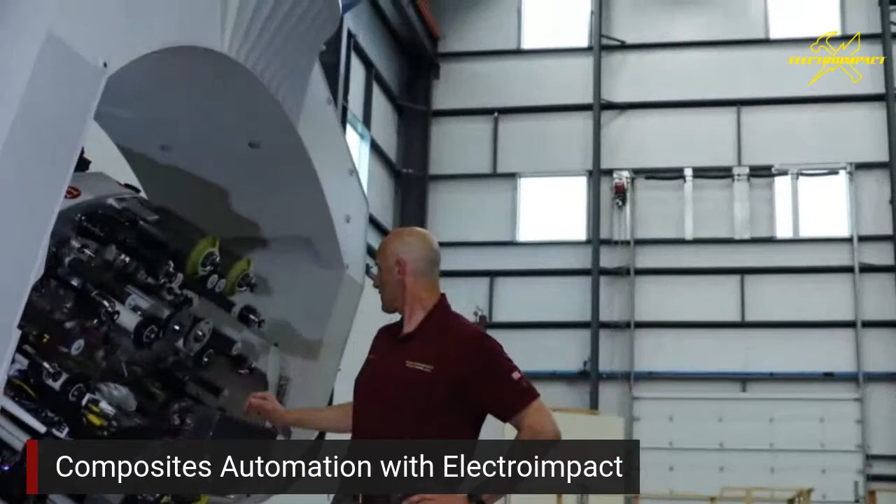Show them the enormity of the cell. Okay, this is awesome. So we see in the background, Kyle, the Blackbird part that was manufactured. Yep, he's got one of the Blackbird panels there, and we're very proud of those.

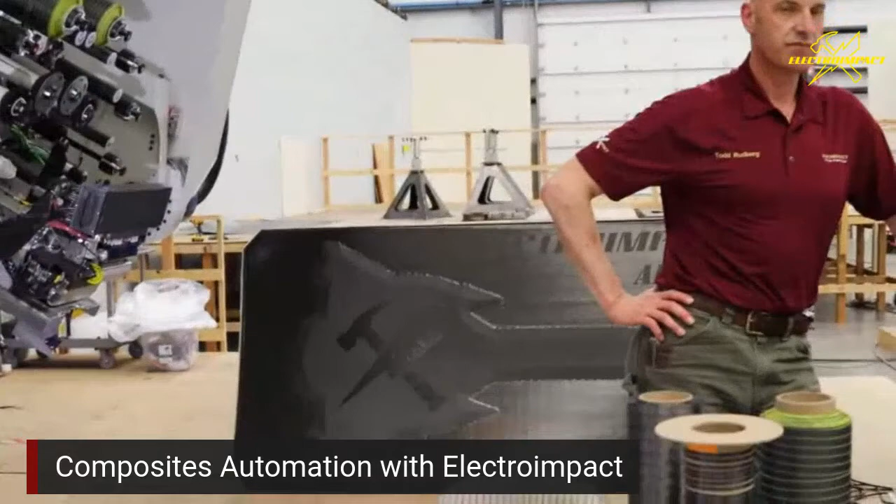We do those with an in-house oven cure. We've got like half a dozen of those kicking around, built out of different materials and built at different times. We continue to build them to hone the tools and processes that we're putting together that make up that AFP 4.0. It's a lot of, as you'd expect, a lot of technology pieces - hardware, software, process design - and so there's a Blackbird in process.

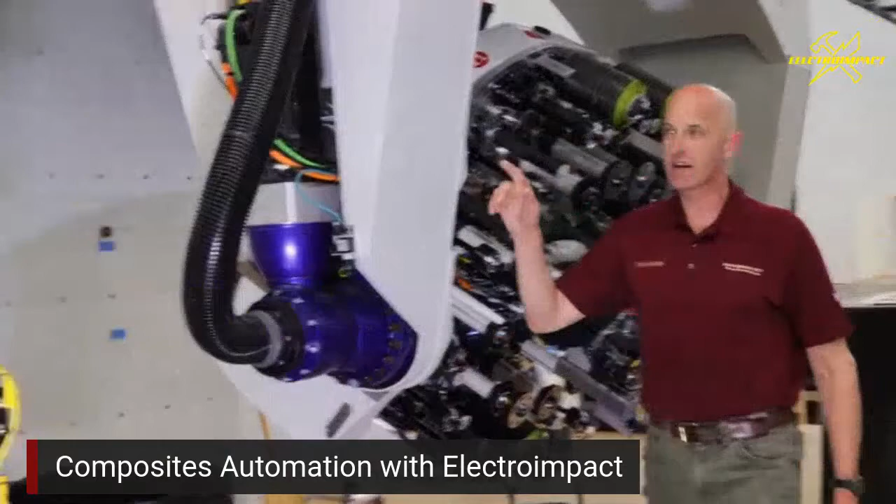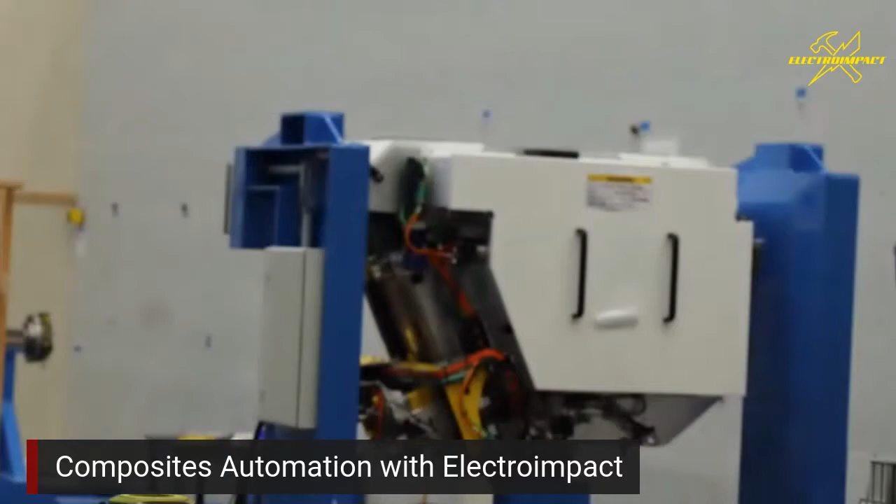So to get all of those pieces to come together requires a lot of iteration and practice. So there he's showing the robotic tool changer on the back of an end effector. That's how we do the modular head change. There's an ATL head and a head stand. Again, all modular, robotic tool change. So we can quickly go from the AFP head that's on that machine right now to the ATL, to ultrasonic cutting, to wider formats.

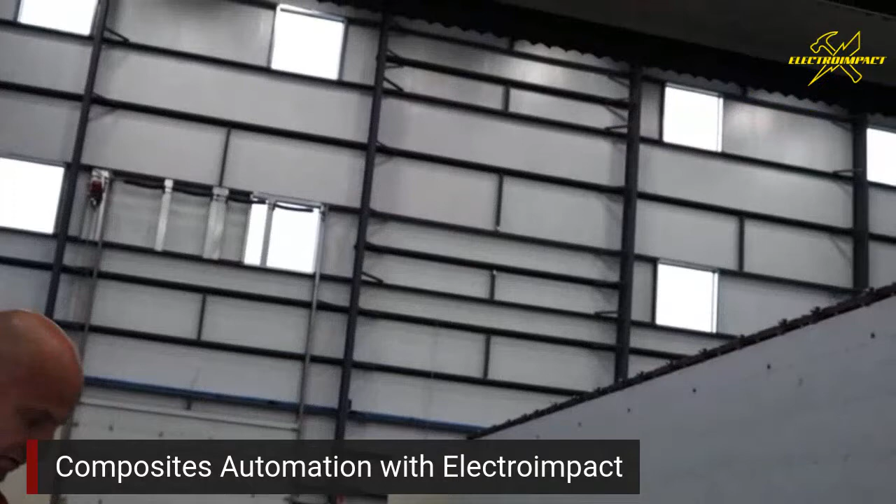This is nothing short of awesome. All right, I'm going to move to you, Kyle, for some closing words.

Okay, so let's see here. So thank you for being a friend, and thank you for coming up on this LinkedIn show. And what else? What would you like to conclude with?

Well, definitely, I appreciate our friendship as well. It's been nothing but good. We appreciate the opportunity to be on here. We think this content that you're creating has a lot of value, and it's great that you're using the tools available and the time available in this current work from home situation. You're taking full advantage, and we appreciate being part of it. So super excited to help you with that and to get a chance to be on here.

Thank you so much, Kyle. You mentioned the visit - anytime that, as the world starts to ramp back up, you're welcome out here anytime. I am looking forward to start leaving the house, but in the meantime, we stay safe. We keep on doing what we can to spread the good word of composites, and I cannot thank you enough for this amazing, nothing short of amazing demonstration and presentation.